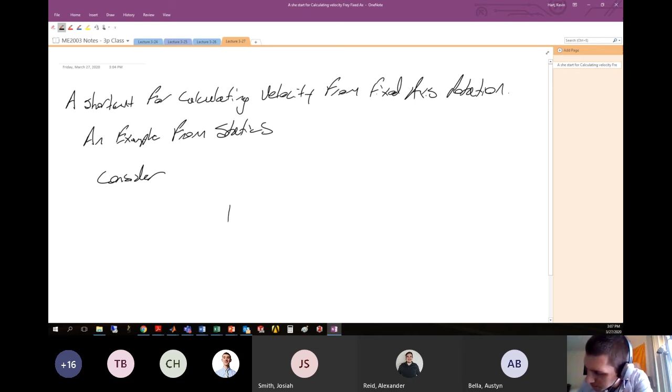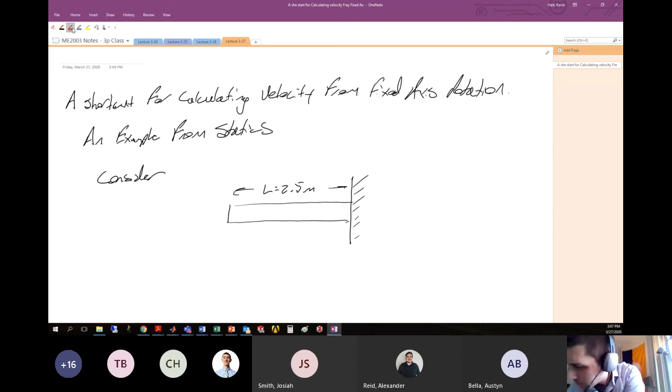Consider in statics, you might have a cantilevered beam that looks something like this. Here's a cantilevered beam coming out of the wall, and let's say this beam has a length of 2.5 meters. Okay, sorry about the handwriting, not my best, I'm working on it, I promise.

Let's say we apply a force to the end of this beam, and give this force a magnitude of 15 kilonewtons. Let's put some points on here: on the left-hand side, point A, and on the right-hand side, point B.

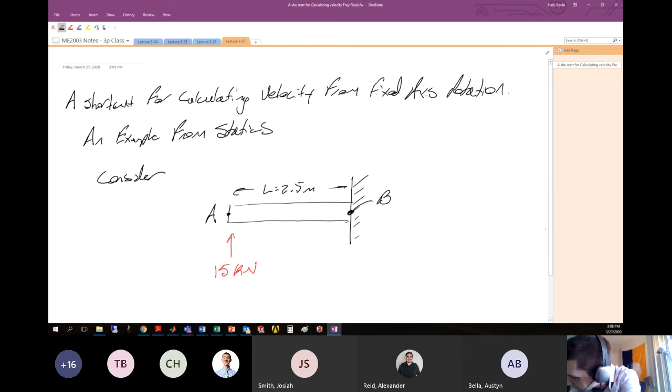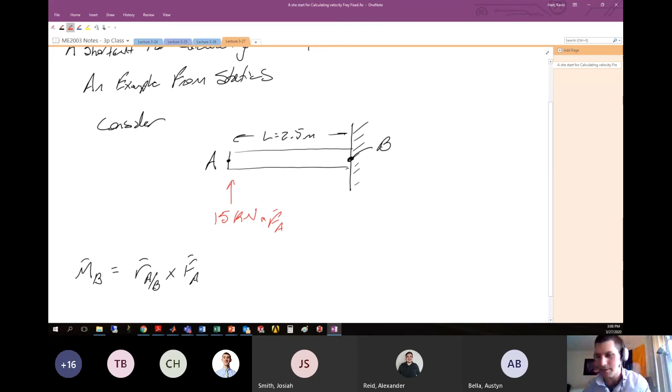If we wanted to calculate the moment of that force about point B, we'd calculate the moment about B, which equals R cross F: the position vector which arrives at A from B, crossed with the force at A. Let's label this force at A as 15 kilonewtons in J hat, pointing upwards. So: force, magnitude, and direction.

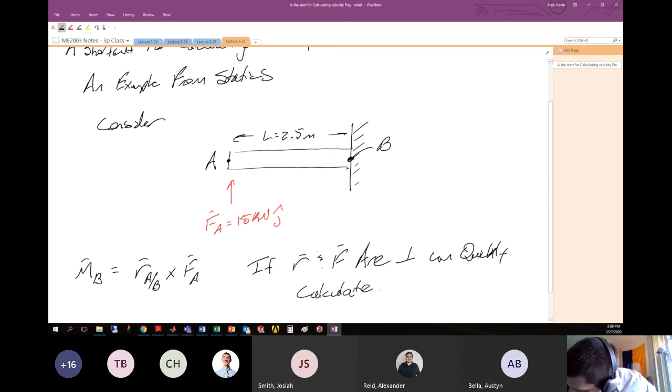You may have learned in your statics class that if R and F are perpendicular, you can quickly calculate the moment, because we know that if they're perpendicular, the magnitude of the resulting moment is simply the magnitude of each individual vector multiplied together.

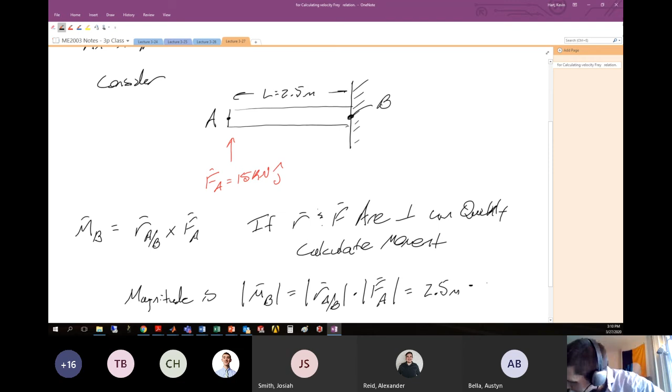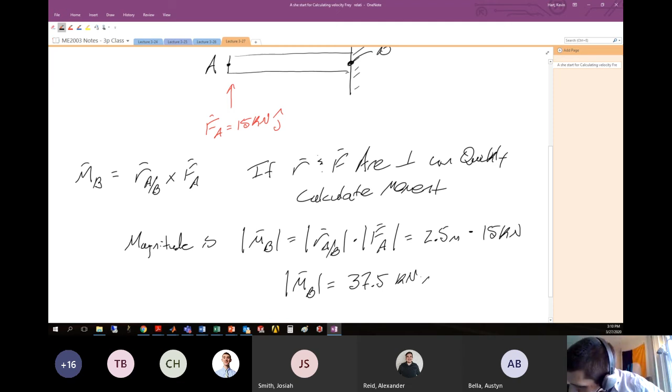So the magnitude of the moment MB is equal to the magnitude of the position vector RAB multiplied by the magnitude of the force at A. Here that's 2.5 meters multiplied by 15 kilonewtons. Hopefully we're dusting this off and remembering it from statics. The magnitude of the moment at B would be about 37.5 kilonewton meters. So this is how you figure out the relative magnitude.

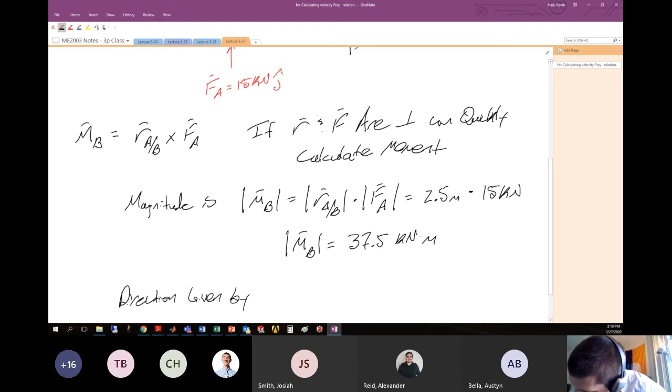Now if you wanted the direction, you're going to employ that fancy right-hand rule that you probably learned about in this statics class for the first time. Direction is given by the right-hand rule.

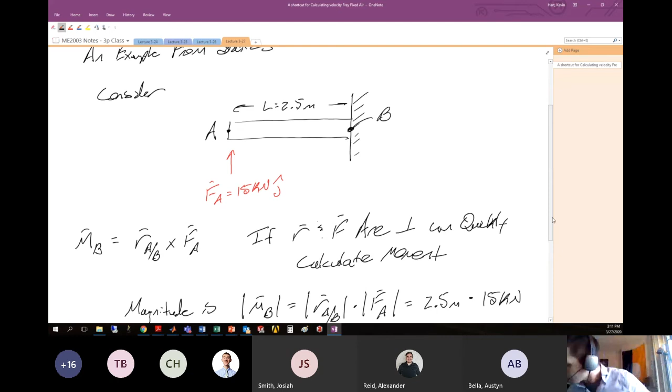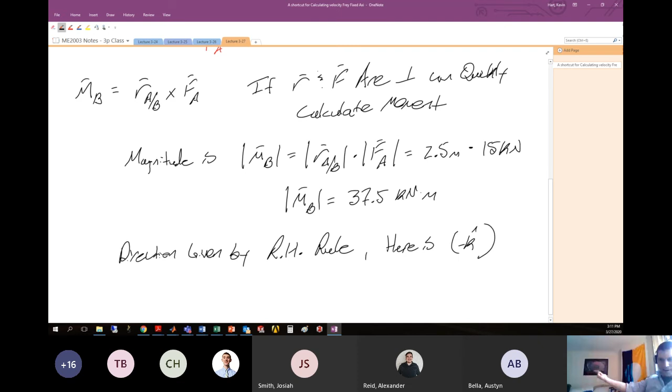So coming back to this piece, the way we want to think about R cross F: I'm going to stick my arm out from B to A, reach out from B to A, and curl my fingers in the direction of the force, which here is up, and that leaves my thumb pointing into the whiteboard. So the direction given by the right-hand rule in this example is negative k hat. If we crossed our position vector r with the force, we'd get our thumb into the board, giving us this negative k hat.

So quickly you could obtain that the moment at B is the magnitude of the moment, which we know is 37.5, just multiplying these two values together, kilonewton meters, and it's going to be in the negative k hat.

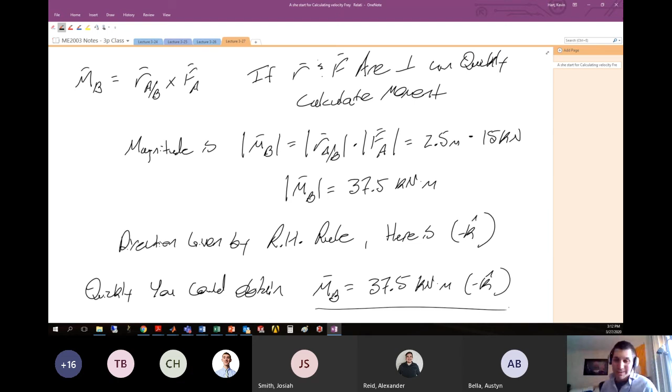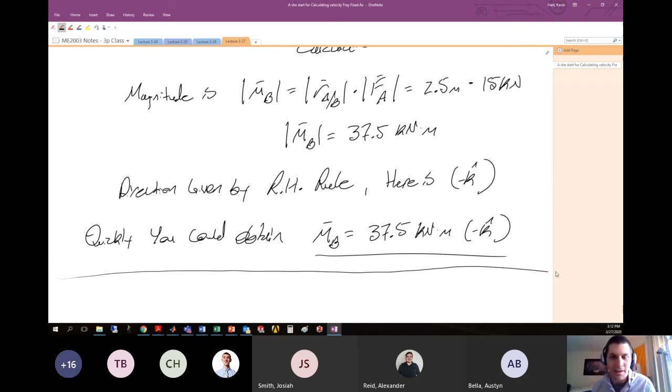That's something you probably did in like week 7 of statics, and once you were taught that, you did it over and over. So we want to make an analogy between that, which you did in statics, and a cross product we commonly see here in this class for rigid body dynamics, which is omega cross r.

So the analogy in our class is typically we may want to calculate the velocity from fixed axis rotation, which might be something like the velocity is omega cross r. The statics is r cross f. Here we have omega cross r.

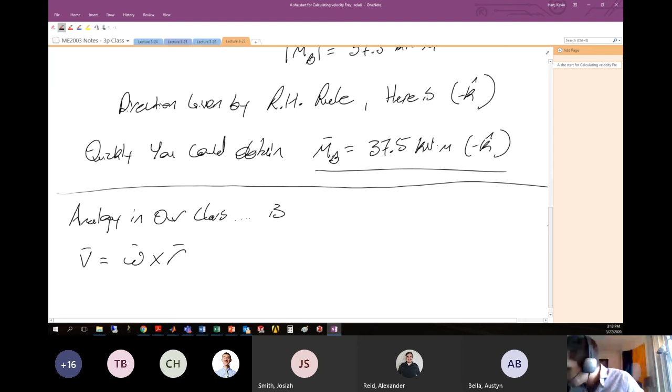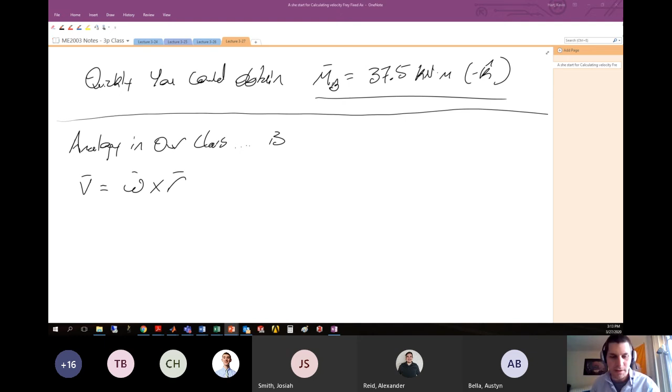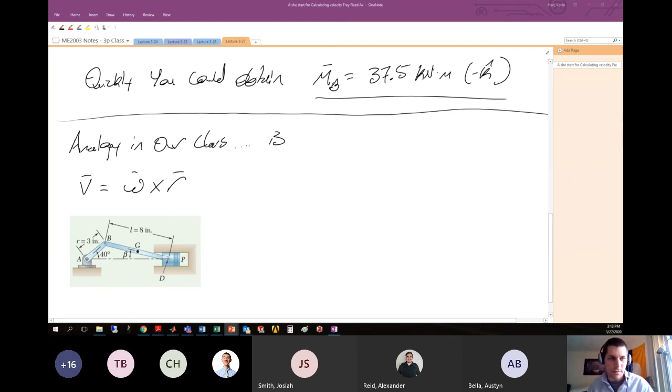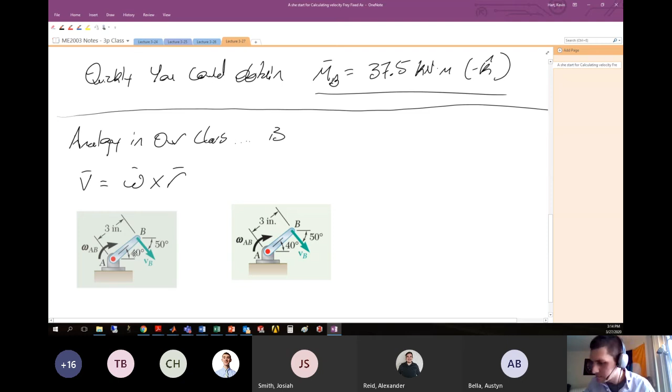And when we did, we first looked at the piece AB, and we looked at this. Okay, so I'm going to get rid of this picture and just slide this guy over. In this particular example, we wanted to start with the velocity of point B, given the position vector r arriving at B from A, and the angular velocity vector omega AB.

Our relative velocity equation was something like: the velocity of B is equal to the velocity of A plus the angular velocity of our piece AB crossed with the position vector locating B from A. Told you, you're going to get sick of that equation.

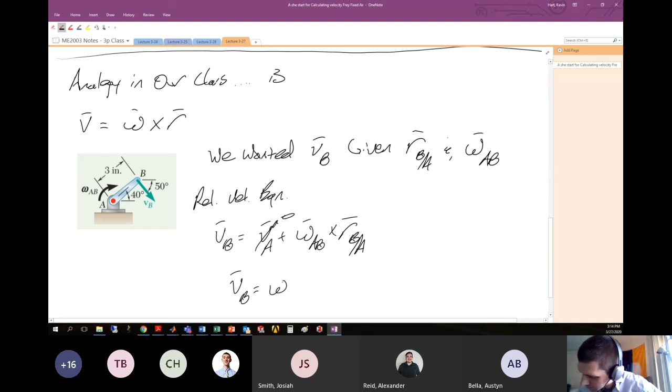Now we know in this particular example, since the gear is fixed here at A, the velocity at A is 0, and we're simply left with the velocity of B is the angular velocity of the system AB crossed with the position vector locating B from A. So this is the cross product that we want to execute.

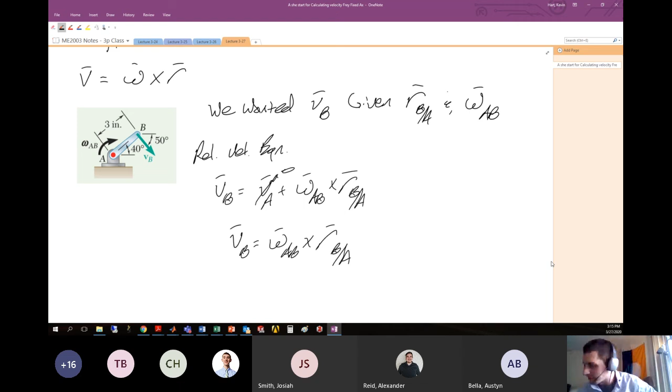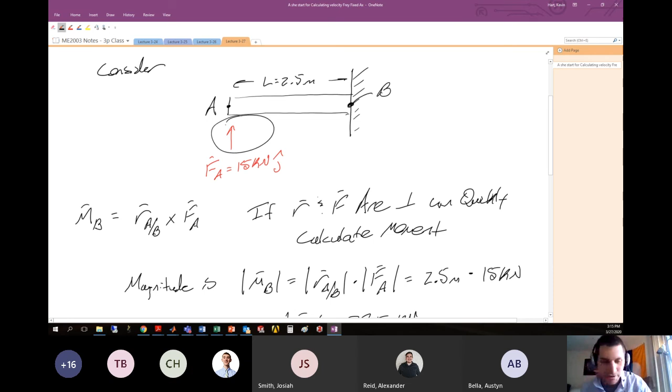Now I want to make the analogy with what we did in statics. Remember in statics, we had something like r cross f, and with that particular analogy, we had to make sure that r and f were perpendicular for the system to work. So back with our statics analogy, here is our position, and this is perpendicular to the force that was applied.

Our shortcut here could work because r and f were perpendicular to each other. So let's ask ourselves, are omega and r perpendicular to each other? If so, we can leverage the shortcut, and if not, we can't. So we need to understand when these two things are perpendicular to each other.

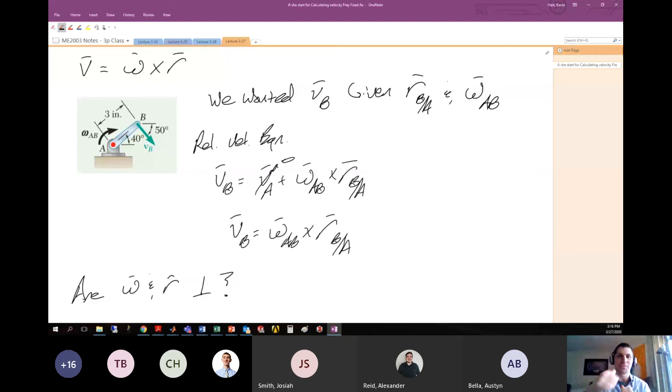Fortunately for us, we are working entirely in the world of 2D planar dynamics. So what that means is when we're doing our analysis, and you've probably seen this now with your homework, anytime we have rotational velocity or rotational acceleration in the plane, the angular velocity vector omega is always pointing out of the plane.

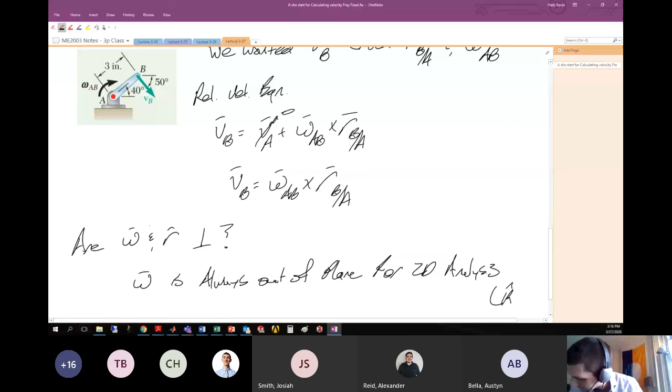So omega is always out of plane for 2D analysis. Usually we write the angular velocity vector in k hat. Now the velocity vector is out of the plane, and typically when we do this analysis, our position vector, locating B from A, is always in the plane. It's on the page of the paper that we're working in. So R is always in the plane, usually i hat and j hat, or some combination thereof.

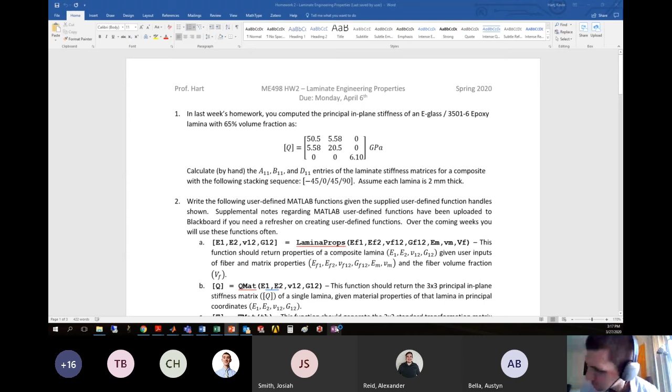Because of that, if our body is always rotating in the plane, that means the angular velocity vector is always out of the plane, and our position vector locating any points relative to other points in the plane will always be in that plane. That means it is always the case in our class that the angular velocity vector omega is perpendicular to the position vector r. So for us, omega and r are always perpendicular. So we can always use this shortcut as long as we have planar motion.

How are we doing? Kind of understand that concept?

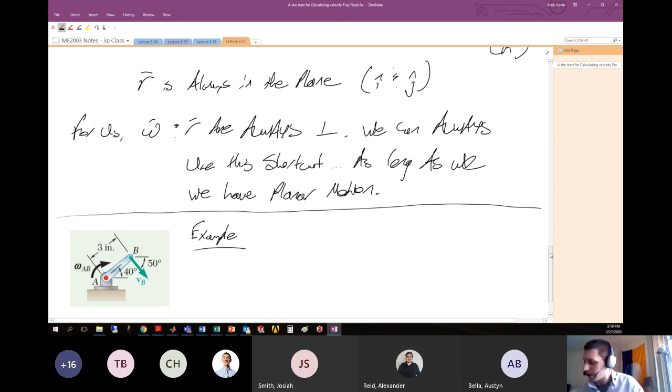So this is an example, and we're running this back. Last time we did the full-blown brute force velocity analysis where we did full vector algebra and came up with a solution. That method is perfectly fine. If you want to go with that method and forget the shortcut I'm about to teach you here, that's perfectly reasonable.

Actually, I prefer using the full-blown method myself, so when you see my solutions to exams and homeworks, you'll see a full-blown solution. I'm not going to write 'used shortcut here' and show you the answer. I try to do the best I can showing you all the depth of the problem. But I want to show you how you might want to think about going through these problems with the shortcut, because it might help you think about directionality of velocities given certain fixed axis rotations.

We want the velocity of point B equal to the velocity of A plus the angular velocity of AB crossed with the position vector locating B from A.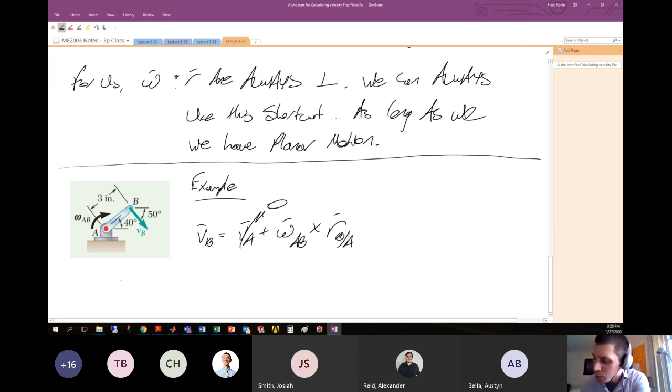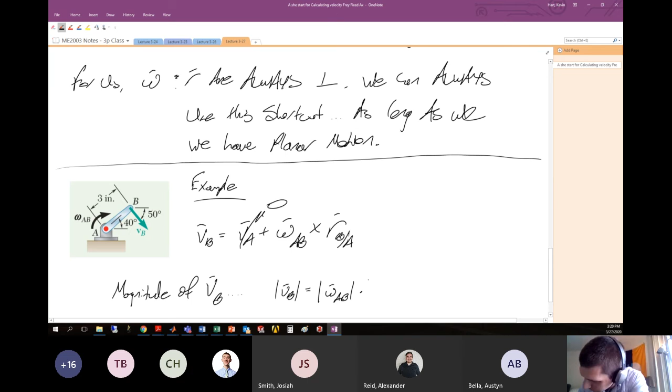The way we're going to enact this: we know that the velocity of A is 0, and we want to find the magnitude of VB. Well, that's easy. The magnitude of VB with our little shortcut is simply the magnitude of the angular velocity vector AB multiplied by the magnitude of the position vector locating B from A.

When we did this problem before, we converted the 2000 RPM of this particular crank into radians per second, and the magnitude of the angular velocity vector we found to be 209 radians per second. The magnitude of my position vector is pretty obvious, it's going to be this 3 inches here.

So it's pretty trivial here to see that the magnitude of the velocity of point B is 209 times 3, which in my head is 627 inches per second. As Bon Jovi says, we're halfway there. We've figured out the magnitude of this particular velocity, 627 inches per second.

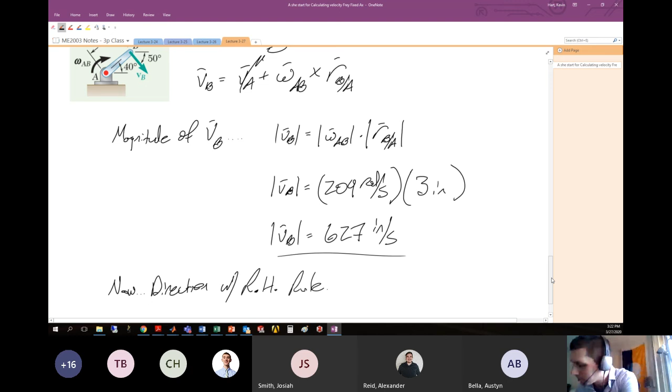Now we need to enact the right-hand rule to figure out the direction in which the velocity will act. So we're going to look at the direction with the right-hand rule. Our cross product generally is omega cross r.

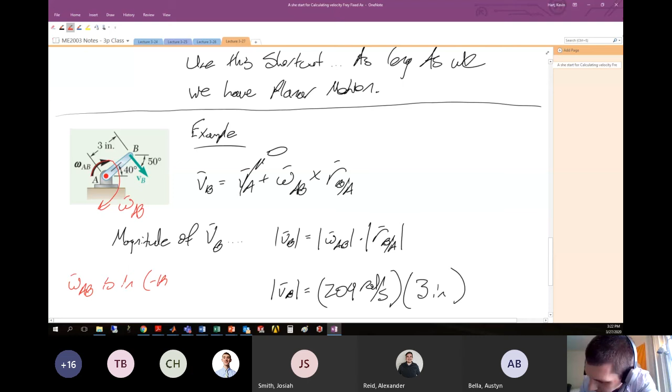The first thing we need to do is establish the direction of the vector omega. If we look back at this picture, here's our angular velocity vector omega AB. We know that it's rotating in the plane with this clockwise motion. So when I curl my fingers in the direction of the motion, my thumb is going to be pointing into the page. So omega AB is in negative k hat. My thumb points into the page when I go through this angular velocity.

Next, I need to consider the direction of the position vector that locates B from A, R, B, A. When I execute this cross product, omega cross R, I'm going to stick my arm in the direction of the angular velocity, and curl my fingers in the direction of the position RBA. When I do that, my thumb will stick in the direction that the velocity results.

Here, my thumb should, if we do this properly, stick in the direction of VB. It's a little hard for me to show it digitally or on camera, but maybe you guys can give it a try yourselves. Think about sticking your arm into the page and curling your right hand fingers in the direction of RBA. Your thumb should be pointing approximately in the direction given by VB here.

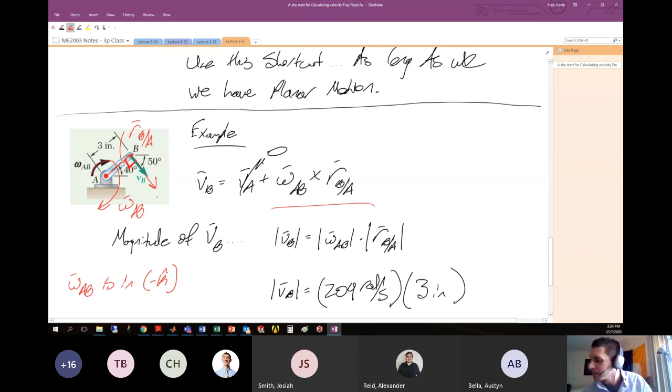You should also know that because we're following these specific rules, the resultant velocity should be perpendicular to the position vector and the angular velocity vector. Here this velocity vector is perpendicular to our position vector, which is true, and it is also perpendicular to the angular velocity vector, which is into the page. So the direction with the right-hand rule is given by the vector we showed above.

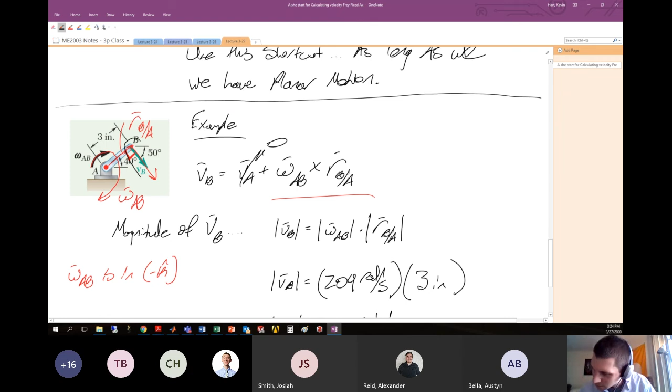Now we have to put a unit vector to that particular location. Maybe I want to define a unit vector along this particular direction to help me define that direction mathematically. So here I'll say that I need a unit vector that defines the velocity of B.

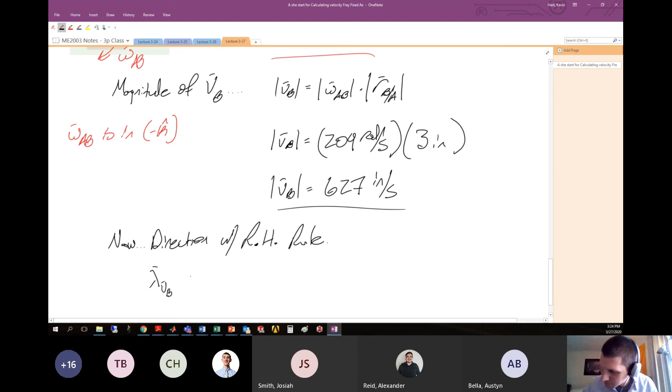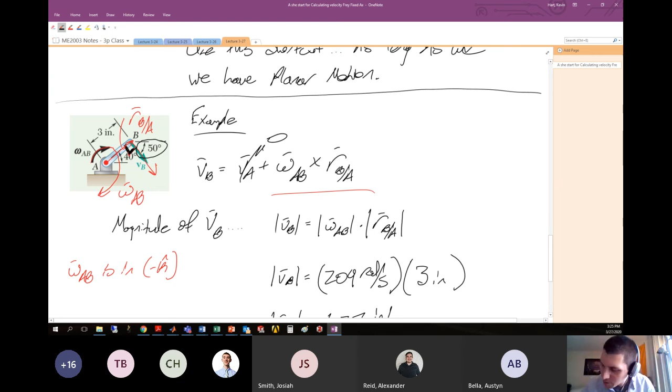All right, after executing the right-hand rule and knowing that we have this perpendicular relationship, we have this angle that's set up for us as 50 degrees. This will help me define the unit vector for this particular velocity. So the unit vector is simply cosine 50 degrees i hat minus sine 50 degrees j hat. This is the unit vector that defines this particular velocity after going through the right-hand rule rigmarole.

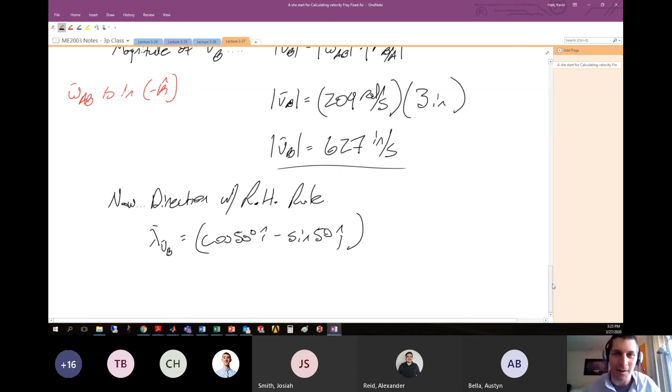So finally, if we want to define the velocity itself, we'll say that the velocity of B is equal to the magnitude of the velocity of B, which we found, multiplied by the unit vector that defines the velocity of B.

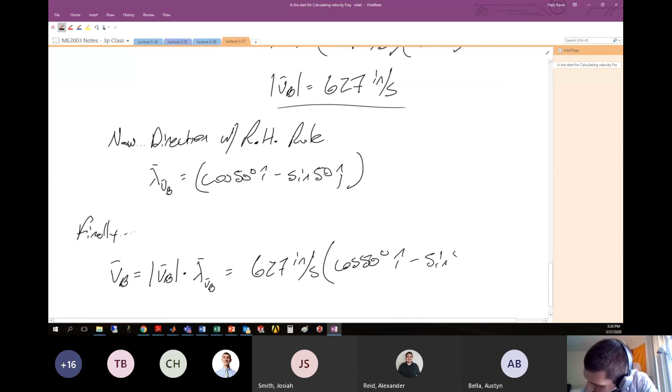So here, this will be 627 inches per second multiplied by the unit vector cosine 50 degrees i hat minus sine 50 degrees j hat. After distributing the 627 to the two different portions of the unit vector so we can write this in rectangular components, you'll end up with the answer we actually found previously: 403 i hat minus 480 j hat, and this is all in inches per second.

So I made that a long discussion. It didn't really seem like a shortcut because I talked about this for 20 minutes. But it can help you, at a minimum, understand what the approximate velocity should be given some fixed axis rotation, and approximately which direction your velocity will end up going given a certain situation. You might think about looking back at homework 1 for when that situation occurred, because you did see that situation there.

So I'm going to pull up your homework 1 really quick and let's look at this. You had this gear crank setup for problem number 5. What you saw is that you had an angular velocity of this link BC, acting with fixed axis rotation about C. So in this example, your angular velocity vector is coming out of the page at you with positive K, and point B here is directed from point C in this perfectly horizontal direction.

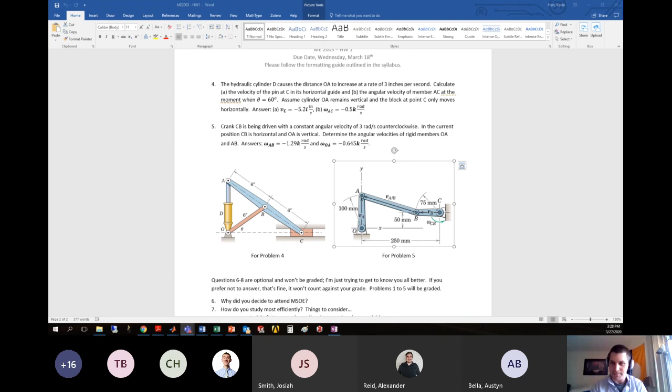So how are we doing in the chat? Any questions so far? No questions in the chat. Are we awake out there? Do we need some jokes? Do we need a Rocky the dog interlude?

Hell yeah jokes, or hell yeah Rocky the dog? Okay, some people want Rocky the dog. I think we got a minute, we can get Rocky in here. Hold on.

Hi everyone, say hi to Rocky the dog. This is my dog Rocky. He's a little shaken up, I just pulled him from his slumber. Rocky the dog, Rocky the dog. Rawr. We can't see. Oh no.

This is Rocky the dog, he's the best. Say hi, Rocky. Hi, Rocky. That's my quarantine buddy, we make quarantinis every night together. Can he do mechanics? He can run after a ball pretty fast, he understands that motion. Kind of, he doesn't really catch it in his mouth very well, he struggles. To be fair, I also struggle catching the tennis ball in my mouth.

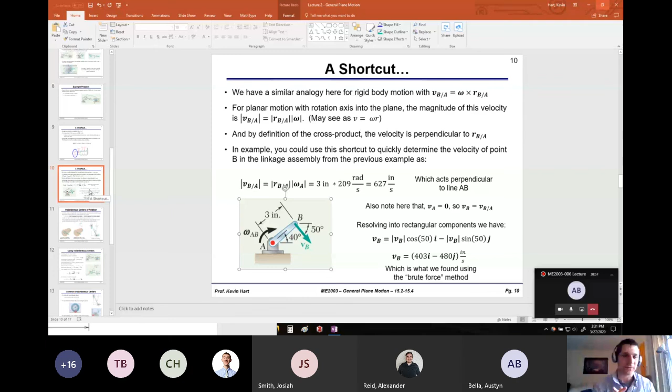All right, continuing with the lecture. So here you should now see the PowerPoint slides relating to the topic I just had at hand, which is how to calculate velocity quickly using this kind of shortcut idea, highlighting the example we just went over.

The next thing you'll notice on the notes is that there's some coverage here on instantaneous centers of rotation. Over the next three slides, there's a series of notes relating to this concept. I'm actually going to forego the discussion of instantaneous centers of rotation in this particular class.

The reason, a couple of reasons. First is the method of analysis for instantaneous centers of rotation is wrought with a lot of assumptions. And if you make an assumption about the situation and are incorrect, it's going to throw everything off.

Secondly, I don't necessarily think that understanding the instantaneous center analysis saves you a lot of time. I think if you're good with vector analysis and cross products and all those sorts of things, that methodology, which by the way always works, there's no real underlying assumptions there, will be much more efficient and will work a lot better.

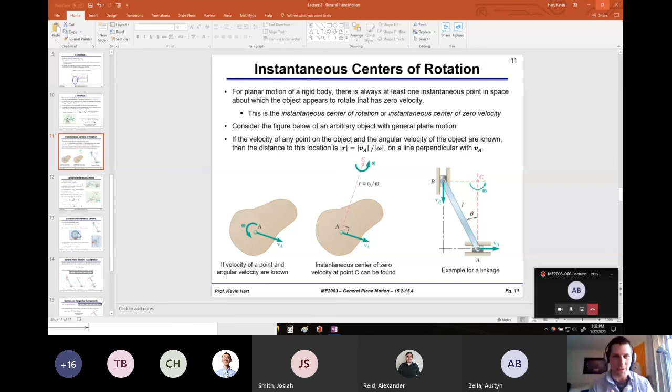So I have a series of slides here relating to instantaneous centers and how you could potentially use them to do your analysis, but I'm going to forego the discussion. I'm never going to really ask you to utilize that methodology to solve a problem. You could always use the relative velocity equations, and those end up working just fine.

Honestly, they end up working better. So it is a topic that's discussed in the overarching view of the class, but because of the current situation, running out of time and all that sort of stuff, I'm choosing to forego instantaneous centers. Instead, it'll give us more time to do some example problems next week.

So I think generally people cover this quickly and don't really use it anyway. So if you want to look at it, great. You want to use it, great, I understand it. If I see it on your homework or exam, I'll get it. But I don't particularly think it's useful, and in fact it can trip you up in a lot of situations.

All right, last thing of discussion today is moving forward on a discussion about acceleration analysis. So I'm going to switch back over to the whiteboard now and we'll go there for our analysis.

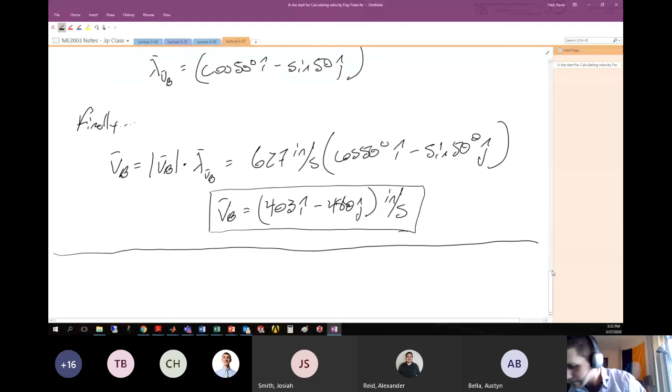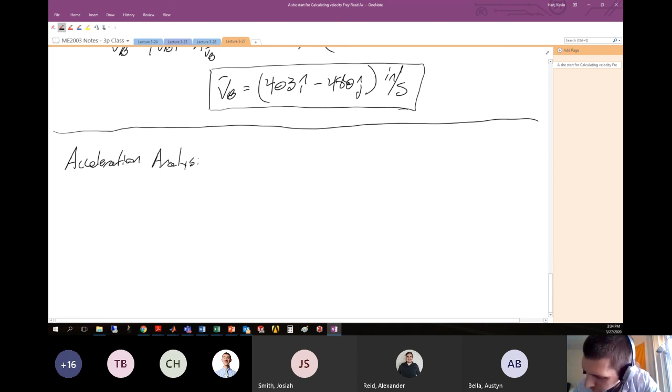Okay, so the next topic in this class will be acceleration analysis for general plane motion. The acceleration analysis for general plane motion will proceed very similarly to the velocity analysis that we had for general plane motion.

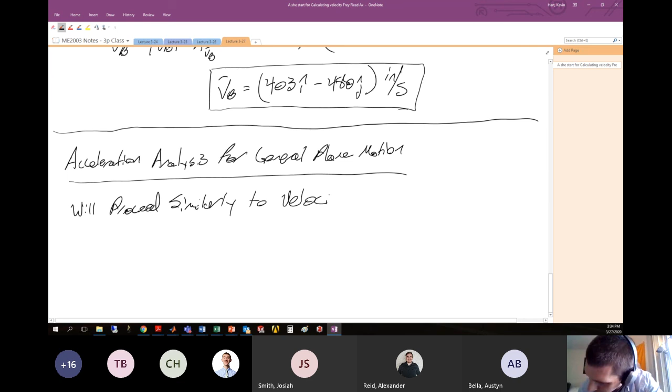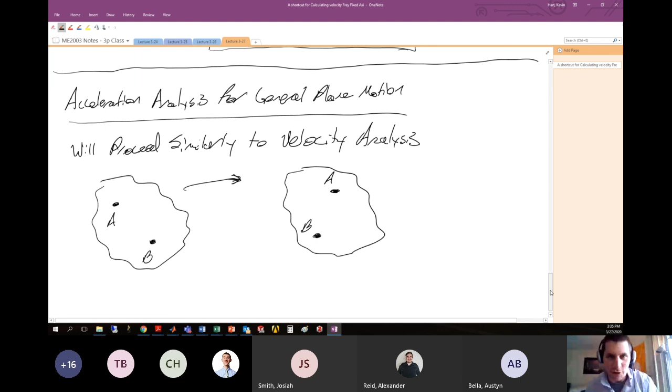Namely, if we have two points on a rigid body - here's our mechanics potato again, here's point A, here's point B - and this moves in space to some other location where it's now rotated, and here is point A and here's point B. So it's rotated and translated and has some completely new configuration. Then we can think of the acceleration analysis here, much like we think of the velocity analysis, where there is a translational and a fixed axis rotation component, and mathematically we just add them together to ultimately have the relationship between the accelerations of the two different points.

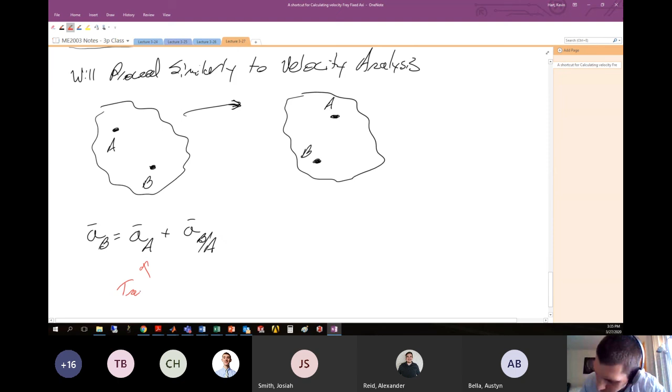So the acceleration of point B is going to be the translational component, which is the acceleration of point A, which hopefully we know, plus the acceleration of point B relative to point A - this is like your fixed axis acceleration components. So let's be clear about this: here, this is like your translational component, and here, this is your fixed axis rotation component.

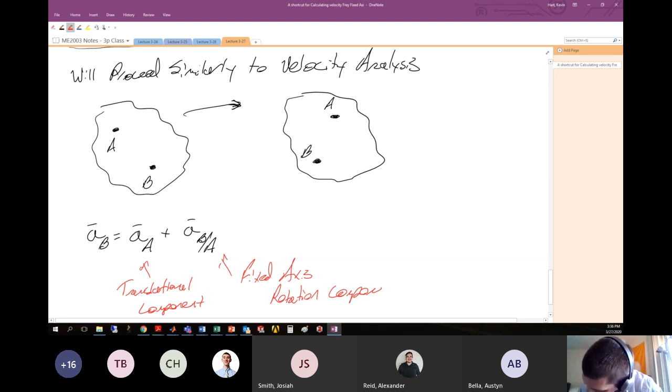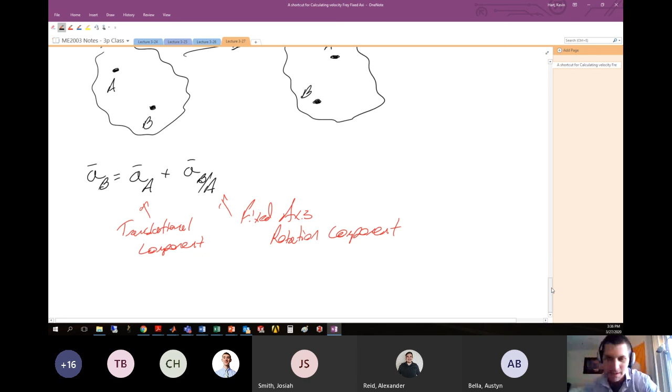All right, if you recall what we did - I guess it wasn't last week, yeah, we were all in quarantine last week, it was two weeks ago now - we derived the acceleration for a body in fixed axis rotation. So let's recall.

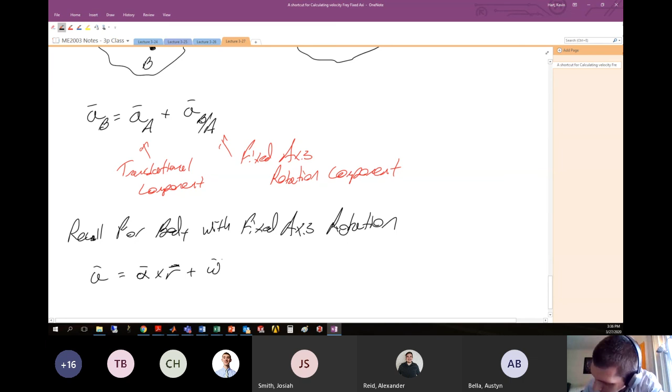For a body with fixed axis rotation, and you did a little bit of this on homework number one with problems one and two, you had that the acceleration was equal to the angular acceleration alpha - let me clean this up a little bit - crossed with the position vector locating your point of interest, plus the angular velocity crossed with the velocity of that particular point. All right, so this was our general equation for fixed axis rotation.

Or you might see this as alpha cross position vector r plus omega cross our velocity written in full form, which is omega cross r. All right, these are the two common forms of the acceleration of an object undergoing fixed axis rotation, right?

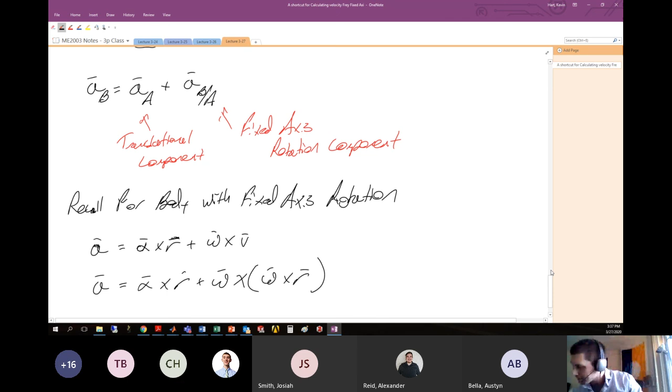So all we're going to do is take this equation here and plug it into the general equation for acceleration between two different points on a rigid body. This is the fixed axis rotation component, and we're going to add the translational component to that.

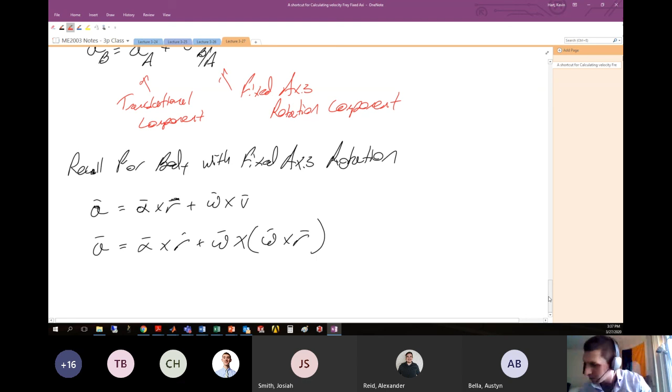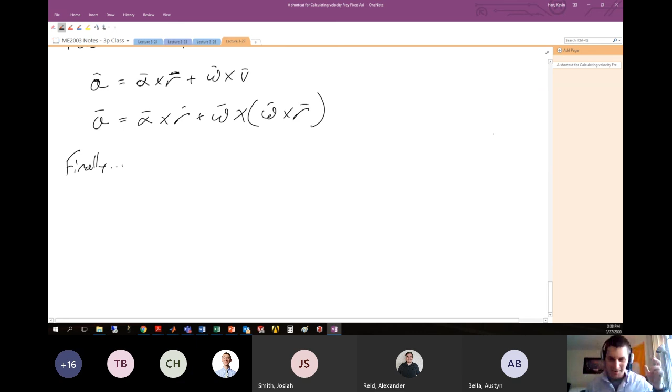Finally, we end with the second of two equations which you will write over and over in this class: the acceleration of point B is equal to the acceleration of point A. This is the translational component of the acceleration, plus the fixed axis rotational acceleration component, which is the tangential portion, alpha cross the position vector locating B from A.

And this is alpha AB. If you want to be specific, this is the angular acceleration of the rigid body containing points A and B, plus the angular velocity of this object crossed with the angular velocity of this object crossed with the position vector locating B from A. All right, so this guy gets a box, this guy gets sparkles, this guy gets a special page in your notebook, if you have a notebook, if you're even taking notes, if you're even awake.

Sparkles! Okay, can you see that I'm slipping into madness here? It's a good thing we're not documenting this with a series of YouTube videos. Oh, wait. All right.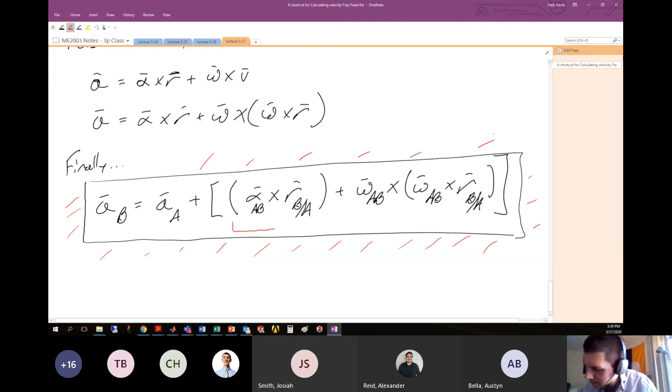So, reminder, if you're looking for the acceleration of some point B on an object, it's made up of the translational component of some other point on that body, plus here we have what we call the tangential acceleration component.

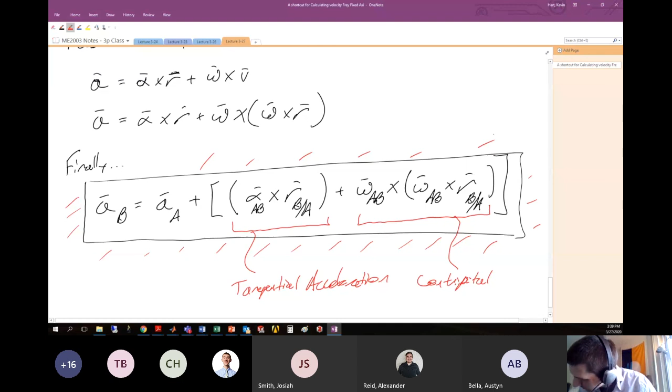And here, this is the centripetal or centrifugal acceleration.

I'll give you a second with that, and then I'm going to pull up some pictures on the PowerPoint slides to show the differences between the translational acceleration, the fixed axis tangential component of acceleration, and the fixed axis centrifugal, centripetal, whatever you want to call it, portion of the acceleration.

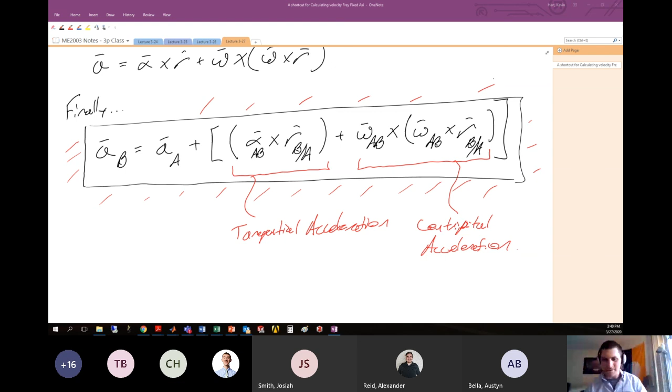I've foregone trying to draw some of this stuff on this pad because if I've already got the pictures in PowerPoint, let's just use those. Sort of makes sense, right? All right, let's take this away now and we'll share the PowerPoint slides.

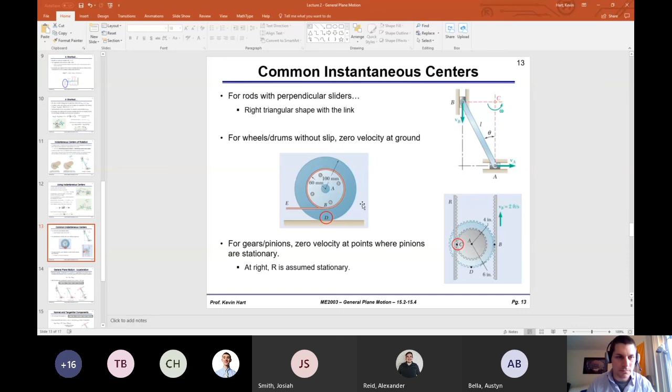All right, so this is kind of where I'm going to stop today. I want to make sure that at the end of every lecture I leave maybe 5 or so minutes for people to hang out and ask questions or talk about any technical difficulties. So I'm going to cut it here today. We'll finish up these slides on Tuesday when we meet again, and we'll do an example problem calculating relative acceleration using this equation. So that'll be it for today's lecture.